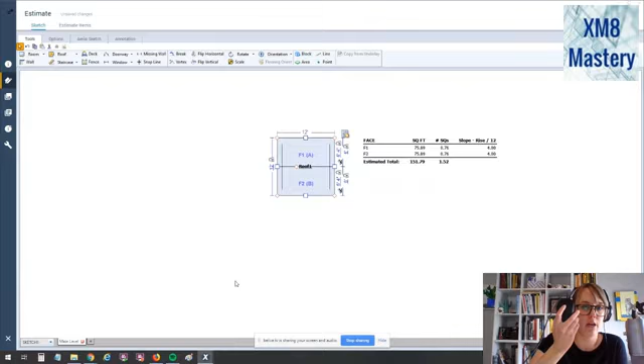Another shortcut that I love: I have a mouse with a wheel. If I hover over that roof first, I can then mouse wheel in to zoom. Get up close and personal. Or I can back out using my mouse wheel. I love my mouse wheel.

I'm constantly in and out on a floor plan because whenever you're trying to work on very small areas, maybe of a floor plan or the roof plan, maybe there's a small roof extension you need to add, zooming in is so much easier than trying to work out here like this. You're going to do yourself a big disservice if you don't learn how to zoom in. This is the easiest way I've found, is getting a mouse with a wheel.

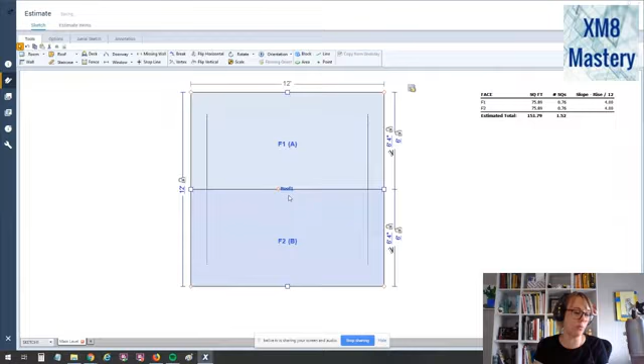Notice that I'm not using my trackpad. I work on a laptop all the time. I do not have a desktop computer. I always work on this huge laptop. I actually get the largest screen they offer. This is a pretty large screen, I don't remember, I think it's 19 or 20 inch, and that's what I work on. It's like a gaming computer, more or less, but with a large screen.

So where I'm going with that is I utilize the whole screen. I don't play around. And the more that you can stop working like this and really get in there up close and personal with your sketches, you'll find this a lot easier to use.

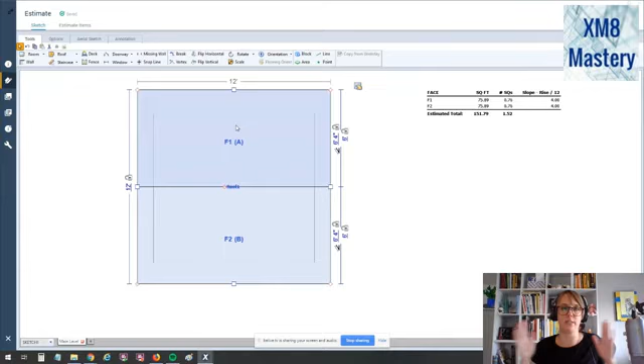Okay, so first thing we're going to do is we're going to change the length. Length is going to be right to left. Width, I'm going to call north to south. So the length is going to be 35 on this one. One thing that I do like to do before I get started is to delete these little roof annotations.

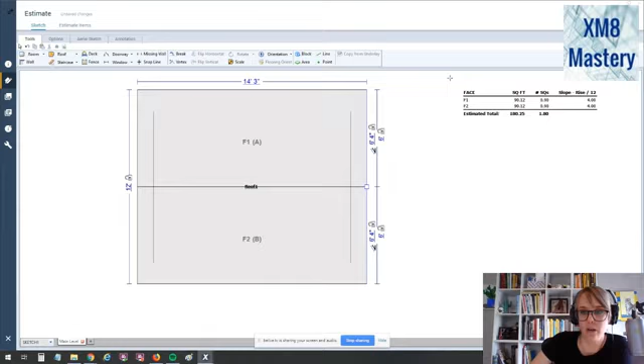I can bring them back later, but they get in my way whenever I'm trying to make adjustments to the roof. Well, in X1 they've done us a nice thing, maybe that's an update, but usually these get in my way and I don't find them very useful. They now bump them to the side. Look at that, that shows you how often I use Sketch nowadays. I don't have to teach it all that often, and I just import measurements. So that's cool, but I'm still going to go ahead and delete them off. Usually they would just hang out and be in your way, so that may still be happening in XM8.

So we're going to highlight them in blue. All I did was just click on them, hit the delete key. There we go, and that will remove those annotations and just get them out of my way. They're extraneous information I don't need right now.

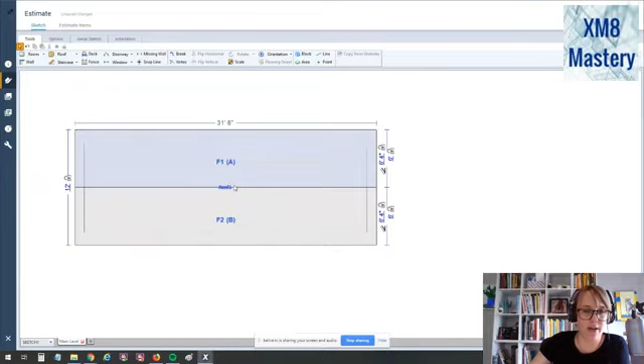Now you'll notice my roof is kind of off to the side, and there's a couple of different ways that we can get it centered into our window. One of my favorites is using the Michael Jackson glove. If you hit your space bar, now that I've placed the roof and it is active, the space bar becomes a different action. So if I hit my space bar, it turns into the Michael Jackson glove, or the hamburger helper, whatever you prefer, and I can left click, hold, and drag my sketch palette.

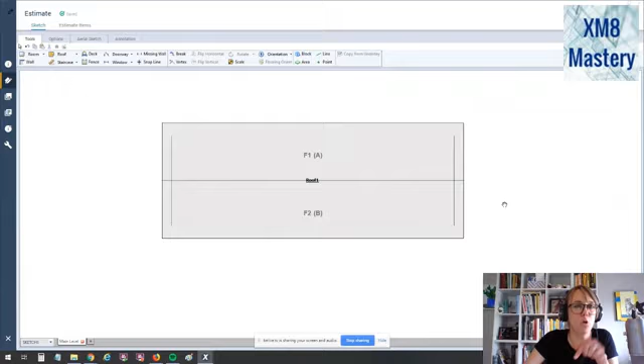Notice that yes, I'm moving the roof, but I'm not actually moving the roof. If you were to move the roof, you would click on it and use this diamond here - that's moving the roof. I don't like to do that because if I have other extensions or a floor plan, I can disconnect roofs, I can disconnect floor plans, and that gets really messy really fast. So the second thing you can use for your space bar is the Michael Jackson glove, and what it does is move the pallet behind the roof rather than the roof itself. I'll demonstrate here in a second when I add some extensions how horrible it is whenever you move the roof itself - things go crazy.

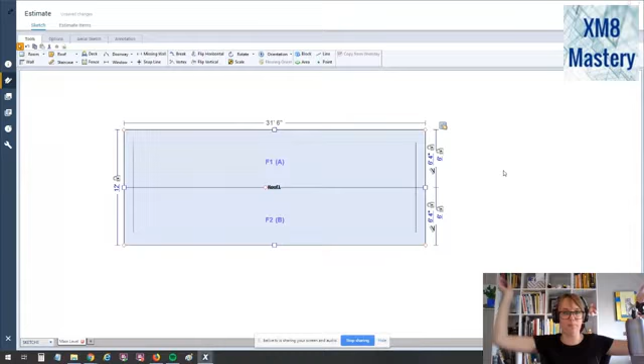Okay, so now that we've got our annotations deleted, we know how to center our roof - it's the easiest, most basic way - and then how to roll in to see more of the roof. Let's learn how to redimension the roof.

So we want 35 for our length, and I'm not going to use the handle right next to the dimension. These little boxes are called handles - they control all of your dimensions as far as length and width. That's one of the most frustrating things when people first learn Sketch. Took me about 5 weeks to not click the handle next to the dimension because that would be logical. To affect the width or the length of the roof, we're going to use the handle over here.

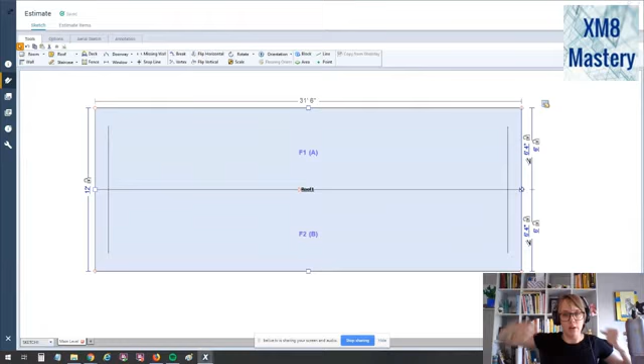Okay, go catty corner - think of these handles pulling in these directions. So if I want to pull out the left, I need to use that left-hand side. If I need to pull out north to south, I need to use the handles - think of them as handles on the roof. So I'm going to left-click there, and I can left-click, hold, and drag, which is the easiest, most intuitive way to do this. Or you can use my shortcut, where I activate the handle by left-clicking.

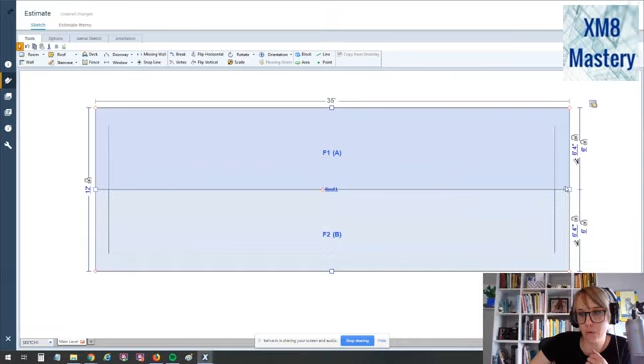Okay, let me do this with you here. We're going to activate the handle by left-clicking, then I'm going to click on the dimension. The dimension's in blue, which means I can click on it and just type it in - 35, hit enter, I'm done. When I have to left-click, hold, and drag this guy in and out, it gets real tedious. I hate it. Even if I'm really zoomed in, you can probably dial it in pretty quickly, but it's just a better practice when you're working with roof plans.

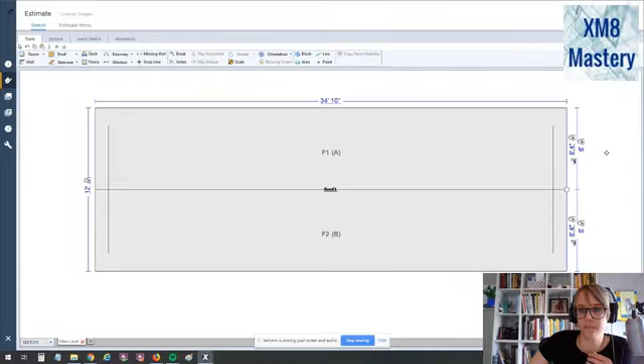So again, you have to click on the roof to make the handles show. They don't become active by you clicking out in white space - that's not going to work for you. You've got to click on the roof, click on the handle, click on the dimension, and type it in. So another common mistake I see is people want to just click on the dimension - that doesn't do anything, in fact it makes other screens pop up.

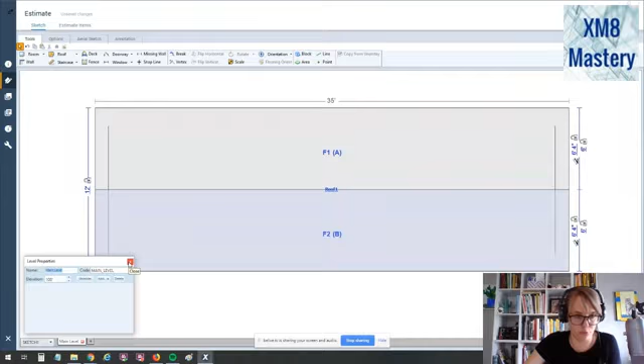So you can't just click there on the numbers. You have to highlight the roof to activate it, then highlight the handle to activate the handle, and then highlight the dimension to type it in. So it's a 3-step process.

All right, so let's affect the width. The width is going to be, I think, 17 foot 8 inches. So here, again, we're not using the handle right next to the width—we're going to use the handle on the north or south side.

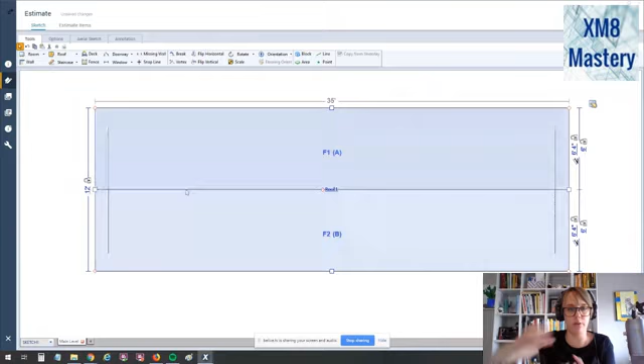It was a loud motorcycle. I don't know if you guys heard that.

Anyways, we're going to left click on that handle, and then I can left click on the dimension. When a dimension is in blue, it means I can highlight it and type. So, 17...

Apostrophe 8—okay, so I can hit the enter key. I don't have to put 17 apostrophe 8, with quotation marks for the inches. I can just use the apostrophe, hit the enter key, and now we've got our roof sketched.

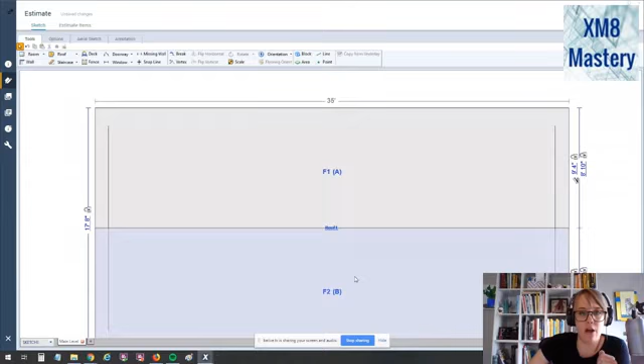Again, when something's in blue, it allows you to affect the dimension. So what's funny about the width is it's usually in blue when you click on the roof. It's just something that's always active, and that's okay.

I just want you to know what the handles do, because in a room, it won't act like this—it won't automatically have something in blue for you.

Second thing—after I get the roof dimension, I immediately name it. I used to forget to name things, and I'd go over to my grouping tree in the estimate items and be totally lost. So if I had a roof plan with maybe 4 or 5 extensions, plus an exterior garage with a couple more, I'd be completely lost.

So I'm going to hover over the roof name, roof 1, click on it, and now I can edit that. I'm just going to put 'main roof'.

Even that will help me distinguish it from an exterior garage or shed, because when you look at your grouping tree, you can't always see exactly what you're looking at in those folders.

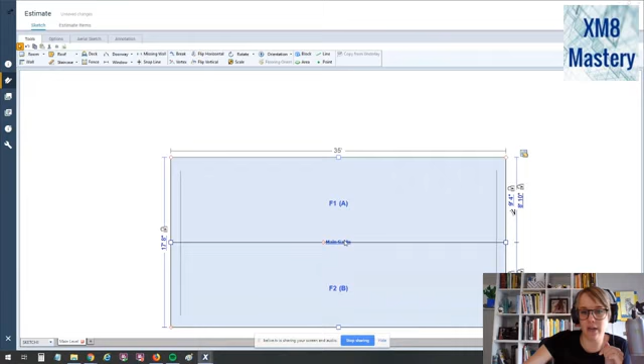So I like to immediately name it—if I go over to my estimate items, you can see it immediately names it there, and I know which roof I'm going to be working on.

So next, let's go ahead. Let me see if I have any questions here.

Yeah, Ran, can you describe your question a little bit better? Recommendations on the preference screen—let me know what you mean. On the preference screen, you can actually edit dimension or sketch preferences, so just tell me specifically what you're looking for in preferences. I think everybody else is good to go.

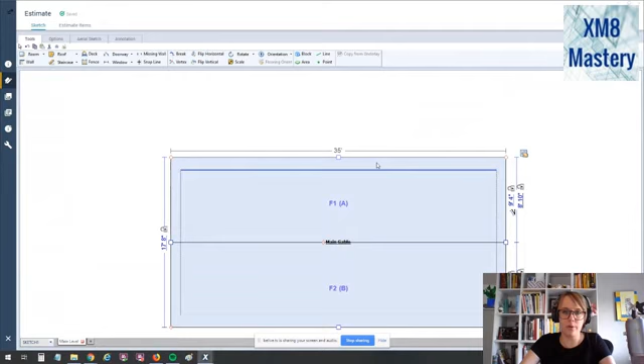Okay, so I'm going to use my space bar, my little Michael Jackson glove, and we're going to add an extension to the southern portion of the roof.

This is the most difficult thing to use in Sketch. It's called the square break tool. Square break is super cool, but it can get you into trouble if you don't know what you're doing.

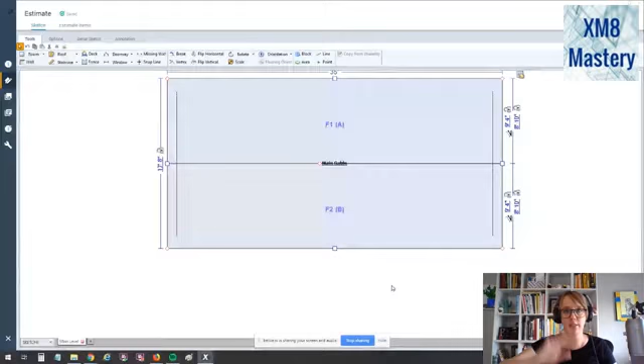I've lost count of how many shortcuts I've given you, so let's say it's shortcut number 5: B for break on your keyboard. B turns our cursor into a little crosshairs with an S in the bottom quadrant—that's your square break tool.

Notice I have the break highlighted up here on my toolbar as well. So what I'm going to do is left click once, let's say at 12. Now you want to get this exact—with your square break tool on a roof, you want to set this square break at exactly the dimension where it breaks off, roof edge to roof edge.

In a room it's different, and I'll describe that next week. But here on a roof, you want to set it exactly. So we're going to left click once to place it at 12 feet.

That sets 2 new handles. Notice that I'm breaking the edge of the roof—now I've got 2 handles I can play with.

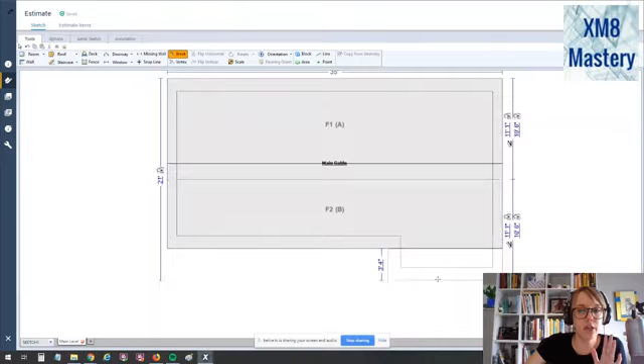Now this is where it gets tricky with the square break and how we want to use it. If I just set that square break, left click, hold, and drag down, notice it's extending the ridge and pulling that eave down with me, like a porch extension. I'm going to go ahead and redimension that to 6 feet.

Click on that, hit enter—we've got a 6-foot overhang. Now, next I'm going to show you a very important shortcut to learn if you're going to be roof sketching.

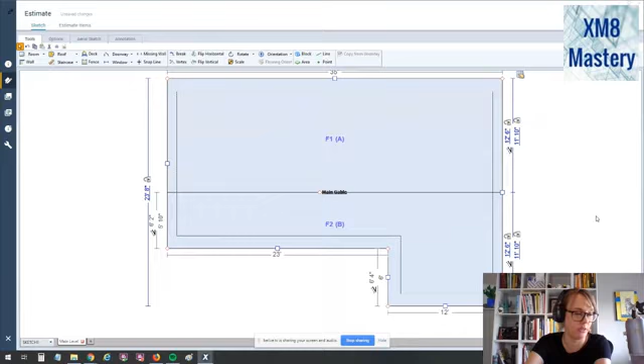You've got to look at your roof in 3D so you can see if it's acting correctly. So your next roof shortcut I'm going to give you is 3 on your keyboard to view the roof in 3D. I can left click, hold, and drag to spin this around.

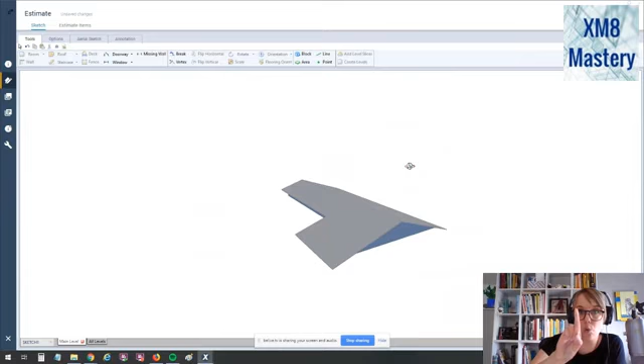So 3 for 3D, takes us to the 3-dimensional space. Number 1 on our keyboard, like a flat piece of paper, is our first dimension - that takes us back to our plan view, the flat surface. So that's not what I want. I want a gable extension, not just a flat roof porch coming off my main gable.

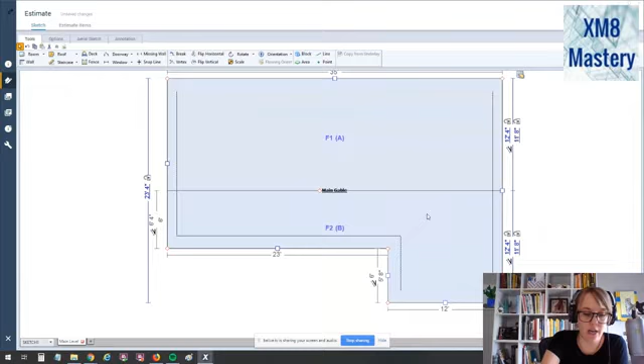So I'm going to use Control Z. My best friend in Sketch is Control Z to undo my last couple of actions. You can only use it up to 5 times, but it's very useful. Control Z is undo, or Command Z if you're on a Mac. Yes, you can still use Xactimate on a Mac, for the most part - I'll probably get in trouble for saying that. Anyways, you can use it with Firefox still, or dual boot on a Mac. That's going to be your Command Z for the undo. Control Z for PCs.

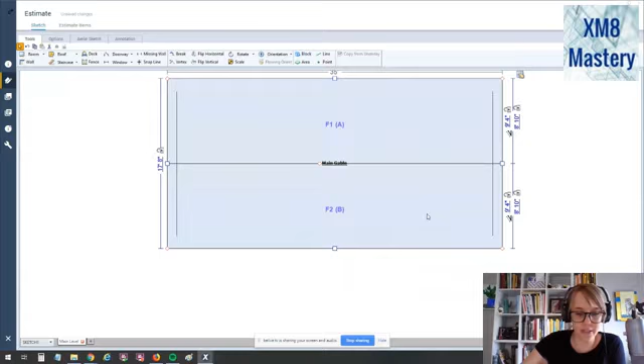Let's try that again with our square break tool. B for break, I'm going to hover exactly at 12 foot. Notice I can't type in dimensions here, it's just something I have to hover. It is helpful to zoom in - you get more precise hoverability with the zoom in. So I'm going to left click once, and now I've got my 2 handles again.

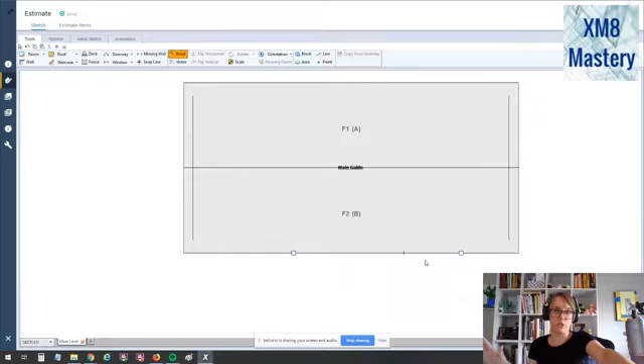Excellent. Now this time I'm going to introduce the control key. This is a very step-by-step process. Step 1, set your square break exactly where you want it on the roof. Once you see the 2 handles, then you hit your control key, holding it down the whole time. Square break first, second control key - hold it down, don't let go. Still holding that down, I'm going to left click, hold, and drag while still holding my control key, and I'm going to get that gable created. See how that's so completely different than the last square break I did where I pulled out that porch area?

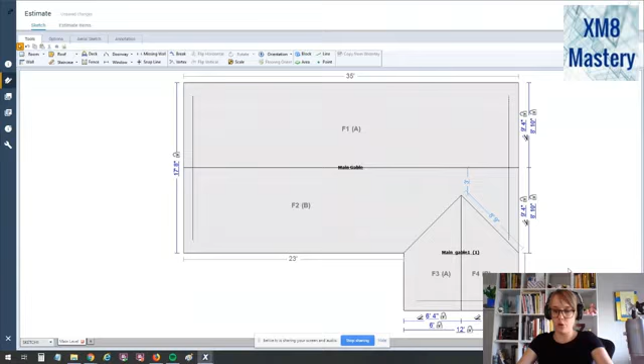Then I can click on those dimensions, type in 6 foot, and we're going to go ahead and look at that in 3D - completely different. You got valleys and a ridge, gable end, a completely different look than that other square break I just performed. So once you get that created, I always name it - I would just put here 'sub gable,' just so I know it's a sub of the main. That's fine, and that's looking really good.

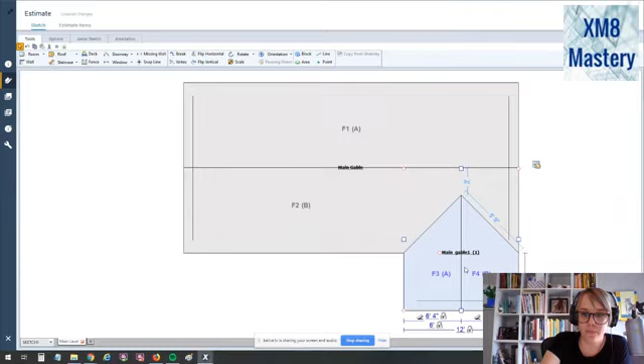Let me do that one more time just for those that maybe didn't catch it. I can either delete off - highlight just the sub gable and hit my delete key. That's a little risky, maybe Control Z would be better here to take that off. But you don't want any gable hanging out there if you delete him off - you need a nice flat gable ready to go. Again, we've got to do that step by step: B for break, set him at exactly 12 foot.

Next, hold down that Control key, doing that the whole time. So first square break, second Control key, third left click, hold and drag, still holding that Control key. Then feel free to go ahead and redimension, and we're going to rename the roof at that time as well.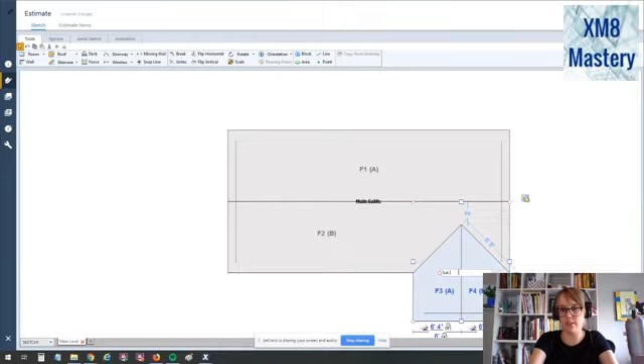Now the thing you need to know about creating subroofs - why didn't I just go and grab another roof, rotate it around with my tab key and place it here? Well, let's take a look at that. All right, so I've got this second roof here, and yeah, it looks pretty much the same. Alena, why didn't you just do that?

Because it makes a difference on your grouping tree. So go to our grouping tree and our estimate items here. The main gable contains that sub gable. Roof 1 is the roof that I just pulled out and added - it's not included in the squares of the main gable.

So when you're adding any material to the main gable, it's not going to roll out onto roof 1, because it's not a subgroup. That's why it's important to use the square break tool. Otherwise, you'll be alienating, and you'll just have a bunch of roofs hanging out everywhere on your estimate items screen. Very important to know that.

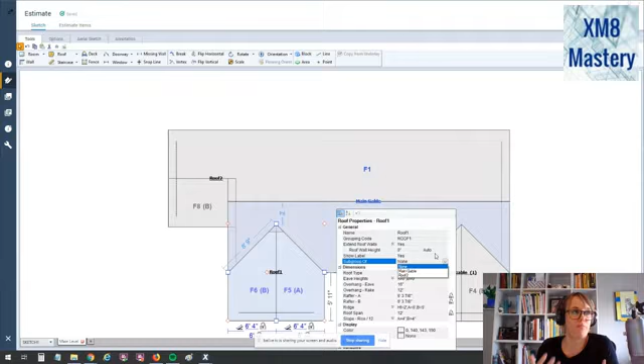Now, you can go into the properties of something such as roof 1 - properties are the hand hovering over the piece of paper. You can make it a subgroup of, but now I've spent 4 extra clicks rather than just doing it the right way the first time. So I can make it a part of the main gable, and these would actually go away on the grouping tree. So it's important to know that the subgroup does exist in the properties.

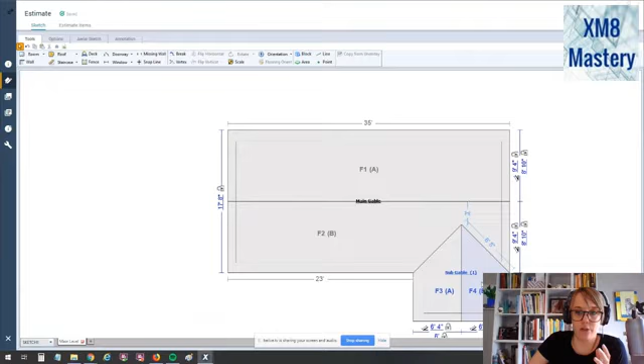Now it's all contained in the main gable. But in Sketch, it's such a big time saver just to go ahead and break it off. Also, if you set your main gable with certain eave lengths or eave depths, and then your pitch, the way I showed you with breaking the sub gable will also pull out all the same properties of your main roof. If you go and grab a new roof, it's going to reset to all the default properties, and you have to go reset those as well - and hopefully you'll remember to do that. So that's why I advocate using the subgroups or sub roofs here, by creating it using the square break tool. It's faster, and it's just the way the program was designed.

So let me see if we have any questions here. Ran does supplements and insurance appraisal for contractors.

Make sure you're calculating waste correctly. Instead of the standard 10 or 15%, you want to use the auto waste. Is that what you're looking for, Ran? Let me know if that's what you're looking for.

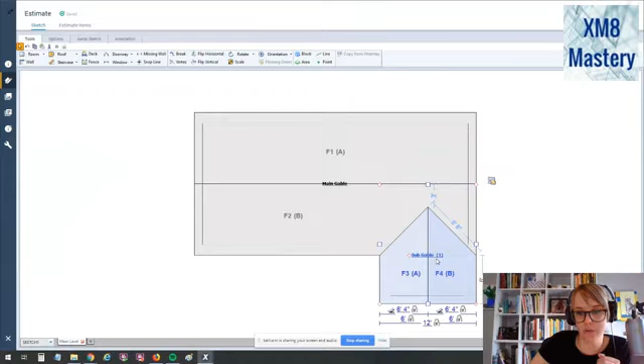And then Tito, with the copy and paste - he's asking about Control C. If you go ahead and copy the subroof and paste it, I'll show you what happens here. It is not - see, that part number is missing. Now this is a little tricky.

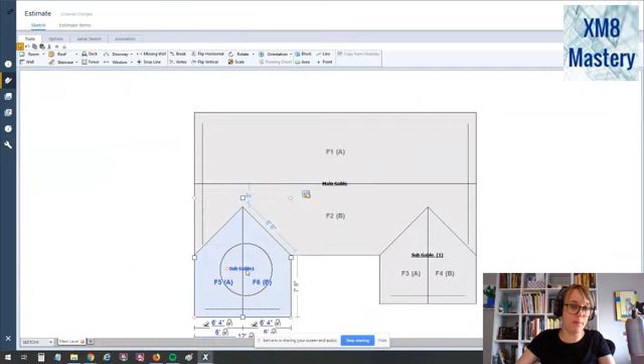So my sub gable that I created using the square break tool has the number 1 in parentheses. That means it's a part of something. Sub gable with just a 1, which is what Xactimate renamed it, is not going to be a part of it. Yes, it'll have all the same properties, but it's not a part of the main.

So Control C, or copying a sub gable back onto the roof, is pretty much the same - it's going to have the properties set up as the main roof does, I believe, but it doesn't group them together in that action. That's why I advocate using that square break tool. Otherwise, we'll have to go to the properties and make it a subgroup of main gable there. And that's what it's going to look like.

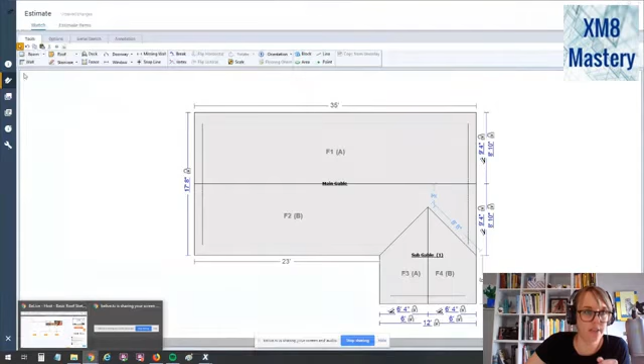Ran was asking about the auto waste. So there's a way in the estimate items to go over the auto waste and add that in Xactimate. I actually did a video on that, Ran. If you'll look at my business page, Xactimate Mastery on Facebook, I talk about auto calculate versus using the regular 10 and 15 and then adding ridge and starter. I've actually gone over that in a previous video - I think it was at the beginning or the middle of April. If you'll go back, I spent the whole talk on Facebook Live going over that. So just wanted to make that note.

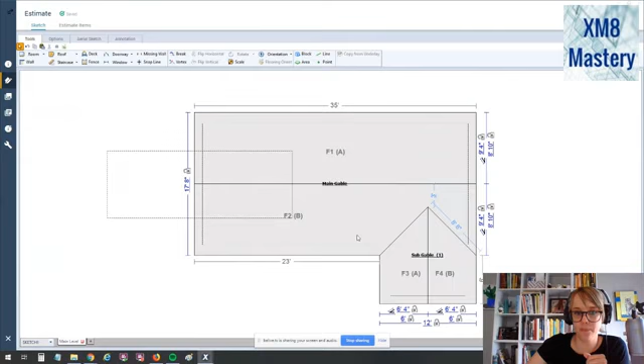So that's what you were going to do with a gable. I'm going to go ahead and highlight all - I'm going to lasso. This is the easiest way to delete everything off of a sketch if needed, also easiest if you need to move something around. Let me do that real quick.

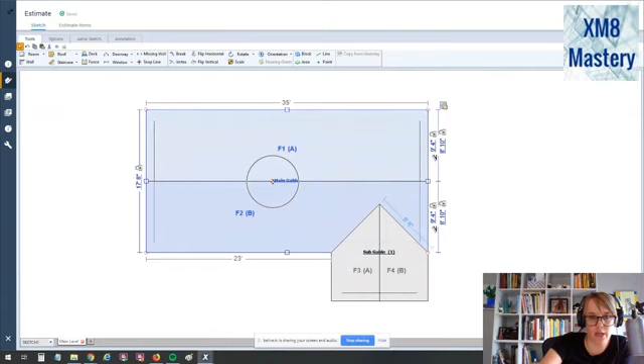Let me demonstrate this. The reason I use the space bar with the hamburger helper, or the Michael Jackson glove, is so that I don't have to remember to lasso everything. So what happens if you don't know what you're doing and you just move the gable using this little diamond - you will disconnect all of your main roof from all of your sub gables. And if you have 8 or 10 of those, you get real mad real fast. That's where Control Z becomes your best friend. Just remember, hitting the space bar, you can move the palette.

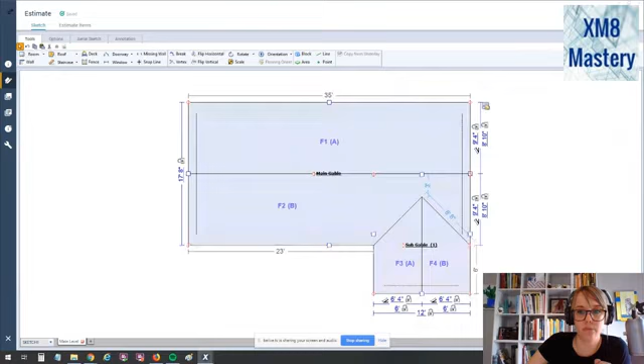Now, what I'm going to do to go ahead and delete the whole roof is left click, hold, and drag this lasso around, highlighting all the roofs, and just hit the delete key. I can't undo because I've done more than 5 actions, so I can't undo the main gable roof. That's why I had to do that.

Now let's go ahead and quickly sketch a hip roof. I'm going to change the pitch here so I can show you a couple things. F for falling off the roof is our shortcut. Here I'm going to hit the space bar in order to select a new style of roof. So we're done with the gable, we're going to go ahead and select the hip, and I'm going to left click once to place that.

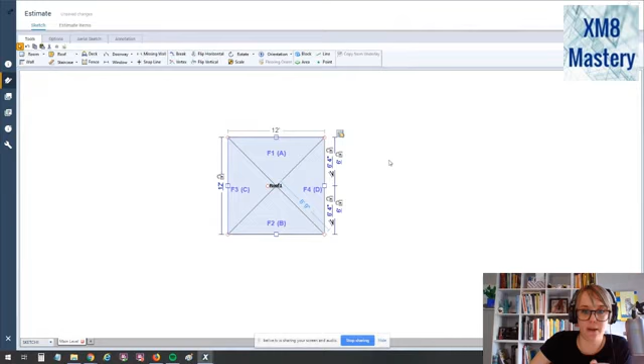Now I can go ahead and affect those dimensions. I'm going to affect the length. Let's make this 35 - I'm just going to click on that handle. That handle activated my length, so I can click in that length, type 35, hit enter. For the width, I can actually just click on the roof, and we're going to do that same 17 feet 8 inches. Now that I have it - 17 feet 8 inches - hit the enter key and it will resize.

Right after I resize my roof, I go ahead and rename it. And in this one, we're going to go ahead and change the pitch.

So the default pitch, I believe, is 4. So we're going to go to the properties here. We want this to be an 8/12 pitch. The hand hovering over the piece of paper, top right corner - you do have to have the roof selected, by the way. Notice the properties disappear if you don't have your roof selected. Select the roof, go to the properties, and we're going to go down under slope.

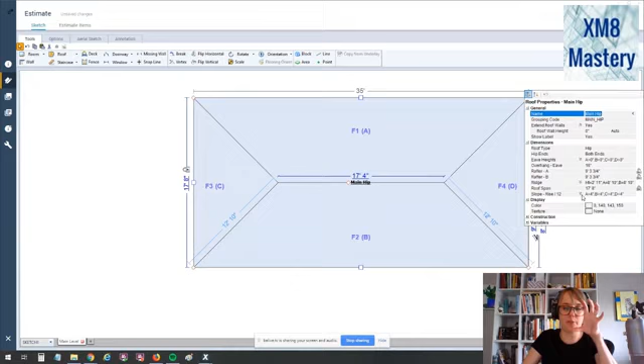Now this is hidden, notice that - I can't edit it the way it is here. I have to drop down these chevrons. I wish I could zoom into that part of the properties, but unfortunately this app doesn't let me do that. It's right there - we're going to hit that chevron and now I can affect all of the properties and change them all to 8. Sometimes you'll see a hip roof that'll have really steep sides and then maybe the ends taper out, which don't have such quite an extreme pitch. You can do that here - you can actually disconnect all pitches if needed and affect each one individually.

But tonight, we just need the 8/12 pitch. So now that I've set that, I can hit the enter key - actually, I can click outside, that'll close our properties. There we go.

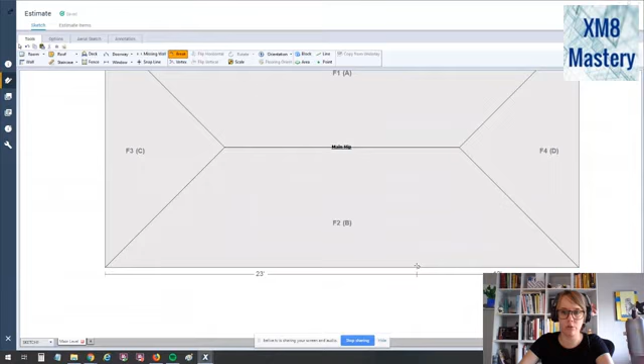And let's go ahead and use that square break tool, this time in a different capacity. So B for break on my keyboard. Last time I was setting it here at 12, correct? And if I held down my control key, I could pull out another hip. That's awesome, cool. But what you want to look for here is, in this instance, we want to create a porch that extends straight out of the middle of this main hip.

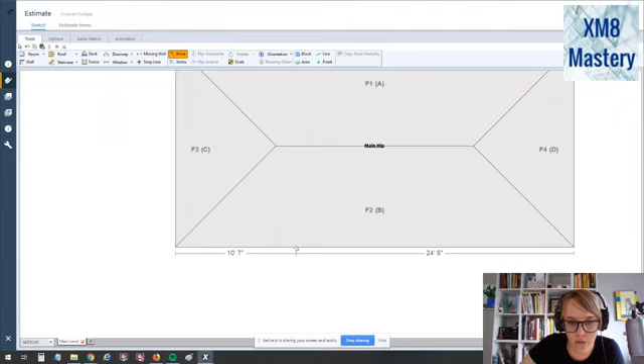So what I'm going to do with my square break, B for break, I'm going to start over here at 12, 10, whatever, and left click, hold, and drag. Before I was just clicking once and it set 1 handle. Now left click, holding, and dragging allows me to have 3 handles. See that? Before I had 1 handle, now I'm going to have 3 handles.

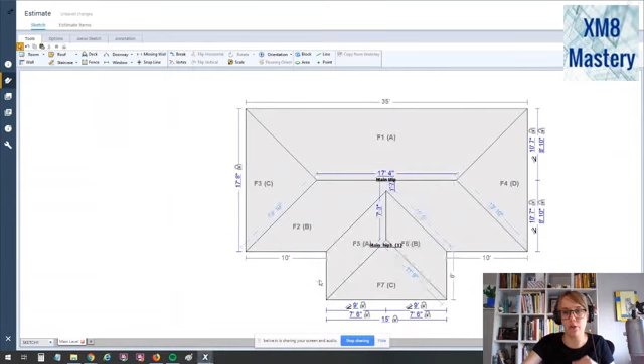Left click, hold, and drag over to 10 on the right hand side. Now I have 3 handles. I'm going to hold down the control key, left click, hold, and drag out the middle to 6 foot. And now you have this look - totally different.

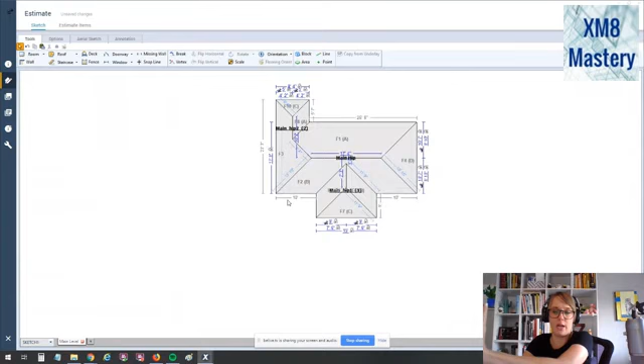Let me go ahead and show you what the square break that I was doing looks like on the back side here. Shares a slope, right? Just clicking once with the break tool shares the slope and doesn't allow me to put it in the middle. When I left click, hold, and drag with that action, it creates this type of look. So there we go - like I said, shares the slope. That was a 1 click. This is a left click, hold, and drag option.

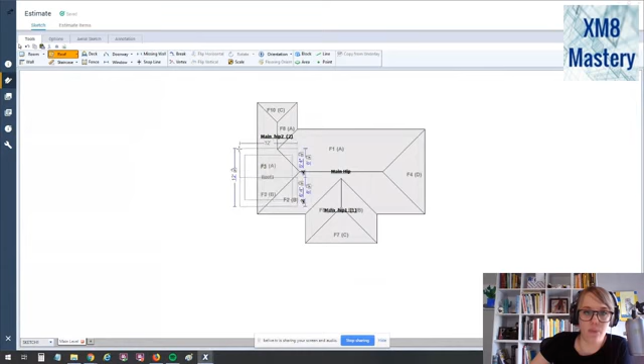Also notice that in the properties of the sub, we've got the same pitch because I used the square break tool and I broke that off of the main where the pitch was already created. So that way, if I go and add another roof here, I don't have to go set it up, right? That's what adding another roof does - it not only disconnects the roof, it doesn't have the same properties. Let me just drive that home here.

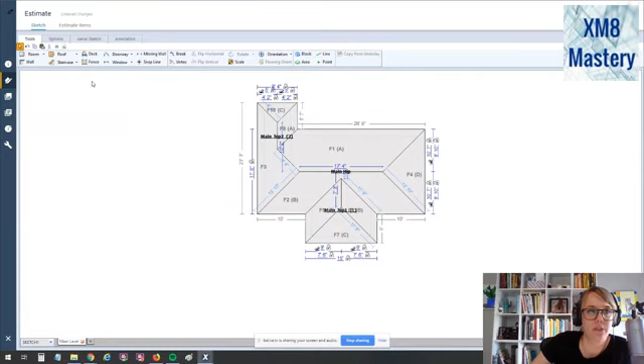So if I add a roof independently, it's not a subgroup, and it reverts back to the same pitch as the default was. Of course I'd rename my little guys here, but I don't want to take up your time doing that. But that's pretty much my best tips for shortcuts for basic roof sketching.

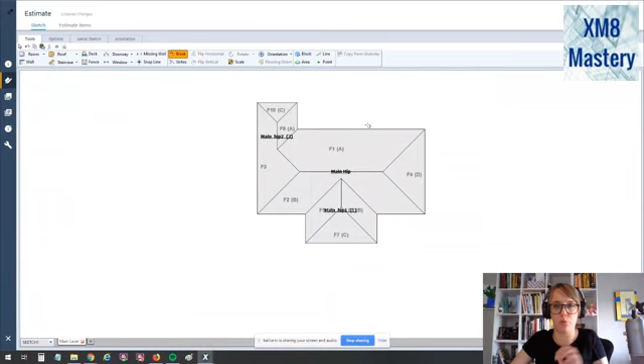That'll get you pretty far. Most roofs are pretty basic. If you need to throw on a gable, you can do that here. You can actually square break, and we could pull out another subroof. You'd go into that subroof, go to its properties, and you can change the roof type back to gable.

Okay, so everything is governed by the properties of the roof, and I could change that back to the gable, and it's a beautiful thing.

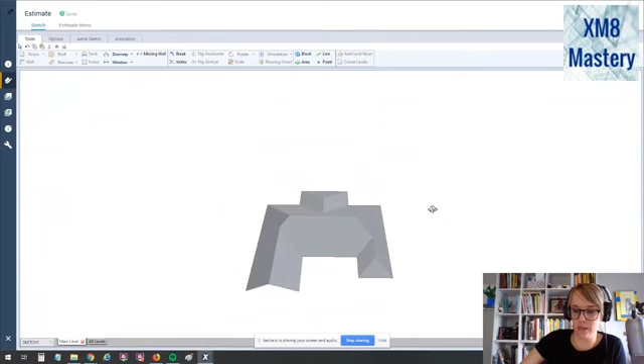So lots of versatility. I recommend pulling out a sketch that maybe you have the measurements for, and just trying it, because the more I can get you to practice this, the better you're going to be at sketching.

Sorry, I got distracted. The more you can practice this, the better you're going to get at it. It's just like running supplement estimates—your first five are probably your hardest. After that, you just rinse and repeat because you figured it out. You've done it before, you've been there, done that. Same with roof sketch, it's something you need to exercise as a skill. Like you saw with me, they change things, they move things around, so it's always good to know that skill.

And if you're importing any roof dimensions, I highly recommend knowing Sketch, because sometimes they don't grab a remodel or an extension to the home that has been added. They can't show you that, so you'd be equipped with the knowledge and skill to bump on a porch or whatever was done in the remodel. If they extended their home, you know how to do that—you just go and break off a new roof, pull it out, and you're done. So that's pretty much Sketch in a nutshell.

Basic roof sketching. If we ever want to do intermediate sketching, I can put on some flat roofs and break out some dormers—I have taco brain right now. It's a lot of fun.